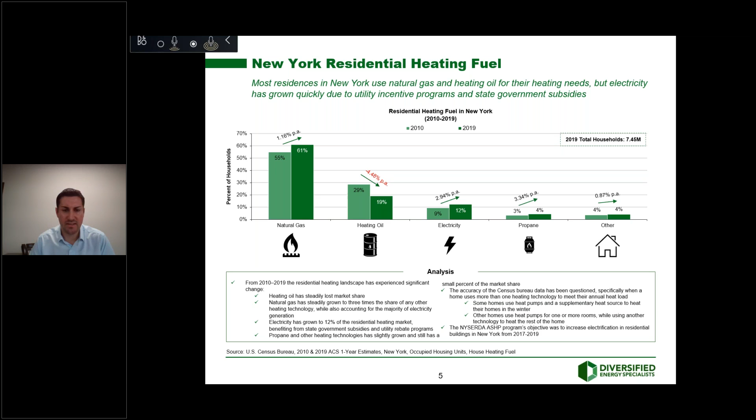Taking a step back and looking at residential heating fuel in New York from 2010 to 2019, the majority of homes are heated with natural gas, 61%, growing at over 1% per year. Heating oil heats about 19% of homes as of 2019, and it's been declining significantly—really the only heating technology declining over the last 10 years. Electricity has been increasing, with electrification initiatives certainly leading to that. Propane has been slightly increasing but still has a very small percent of the heat load.

Looking at the program, there were 5,756 applications from single-family detached homes for rebates over the course of these 3 years. The total of all applications for the program was just under 10,000. My study focused singularly on single-family detached homes. Of those, I determined over 93% were not whole home solutions, and about 6.7% were whole home solutions—that was about 386 whole home solutions over the course of those 3 years.

Putting that into perspective, you're talking about 130 homes per year converting to air source heat pump systems as whole homes. In the scheme of things, states set goals—New England ISO, New York ISO set electrification goals—looking to do hundreds of thousands of homes per year and have over 1 million homes. In New England, ISO New England wants over 1 million homes by 2030 converted to electricity.

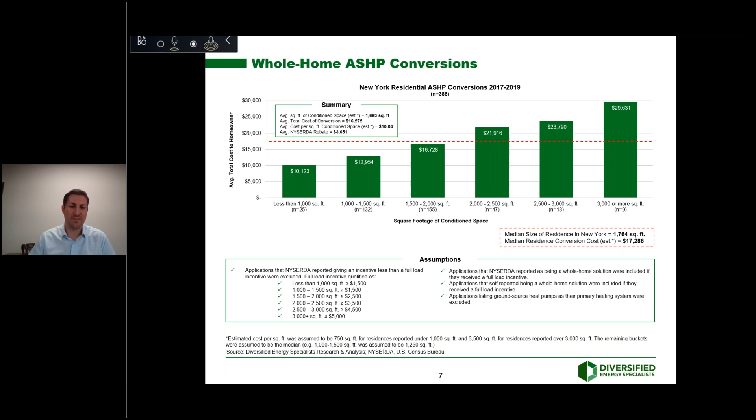The average NYSERDA rebate given for these whole home solutions from the system benefit charges was about $3,681. Scaling that and looking at the median size residence in New York, which is 1,764 square feet, the median residence conversion cost would be just over $17,000. So if you're looking to switch from whatever technology you have—heating oil, natural gas, propane—to an air source heat pump system, you're looking at spending at least $17,000 on average. I think that's significant and certainly telling as to why there are so few conversions.

I broke down the data a little more. I wanted to show—certainly in the Massachusetts study and in this New York study—the range was so wide. Typically with self-reported data, you see a really wide range of numbers. But looking at even the higher end, there's only 9 whole home conversions of 3,000 or more square feet, and the range is extreme. The lowest cost was $17,437, and the highest cost was almost $65,000. So it's very high cost.

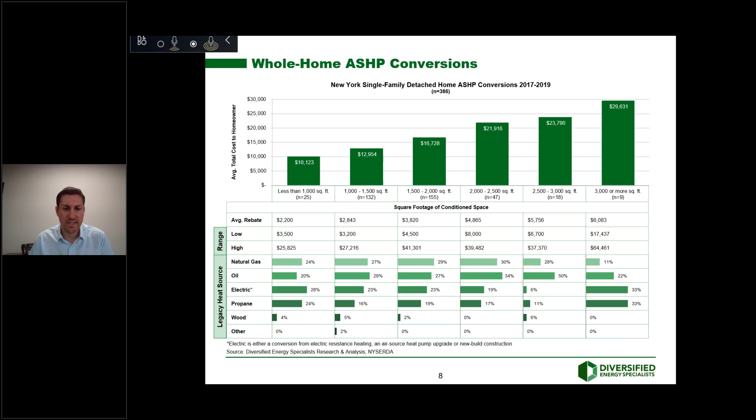Looking at the legacy heat source, the type of fuel used prior, it's mixed across the board. I think a lot of them were moving from either electric resistance or previous air source heat pump systems to an upgraded system, which I think would lower the average slightly. But that's kind of where it came out.

Looking at the legacy heat source, the majority, well, the largest conversion was from oil, then natural gas, electric upgrades, then you'll see propane, wood, and other as well.

Kind of understanding where the size homes based on the technology, you'll see it skewed slightly. The smaller homes typically are converting from electric. The larger the home you get, looks more natural gas and oil.

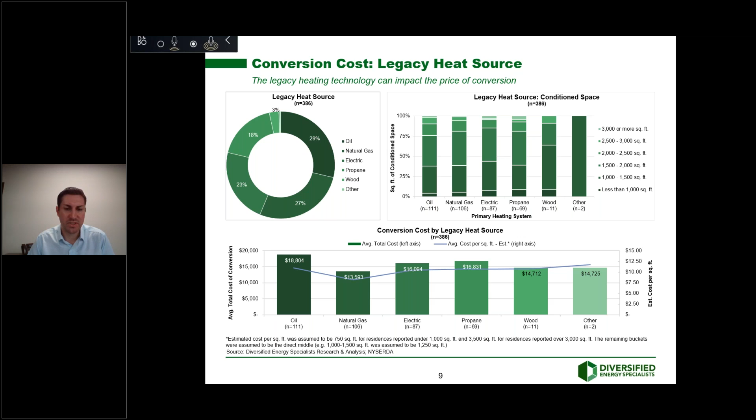But looking at the conversion cost by heat source, I think this chart's really important. There's 111 homes that converted from oil to air source heat pump systems for their whole home, and the average cost of that was almost $19,000. So it seems to, at least from this data, be skewed on the upside. On heating oil, it's going to cost a lot more to convert a heating oil home to an air source heat pump system than others. I think that's certainly a benefit to us versus the natural gas homes, which was almost more than $5,000 less on average for pretty much the same number of data points.

Looking at the heating system type, it was skewed across the board. I think looking at the self-reported data, there was a ton of unknowns and other reporting in there. So I think this was difficult, but I think the main point I want to make with this slide, and at least with this data, is that so many homes are so different, and whether you have a ducted system, baseboard heating system, central forced air, you'll see the conversion costs skew so much, and why you see such a wide range. For a 1,500 square foot home, you could see a cost of $10,000 or a cost of $55,000

based on how the home's designed, how the heating system's designed. So it's good to take a large bucket of data and find an average, but you could go out to any individual home and come up with a much different number just based on how the home, how the heating system, prior heating system was in place. So I think it's good to at least show there's such a range of heating systems, a range of legacy heat sources, and a range of prices to convert each home.

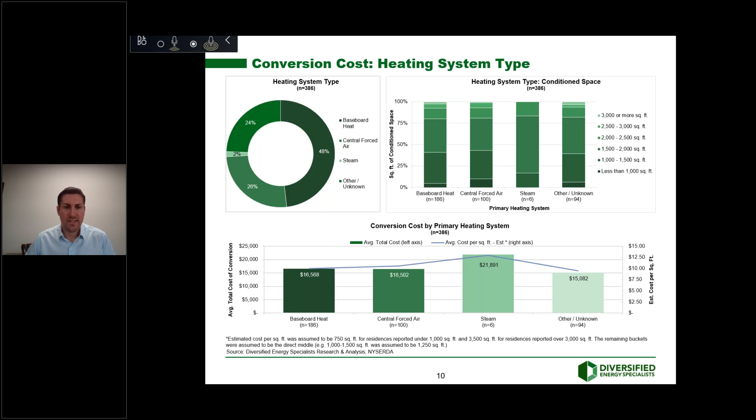So that was there. Moving on here, so location-wise, I kind of ran a heat map of where these air source heat pumps were installed. The whole home solutions part of the data source and reporting is they gave a zip code. So looking at it, you'll see very few whole home solutions were put in place in upstate New York.

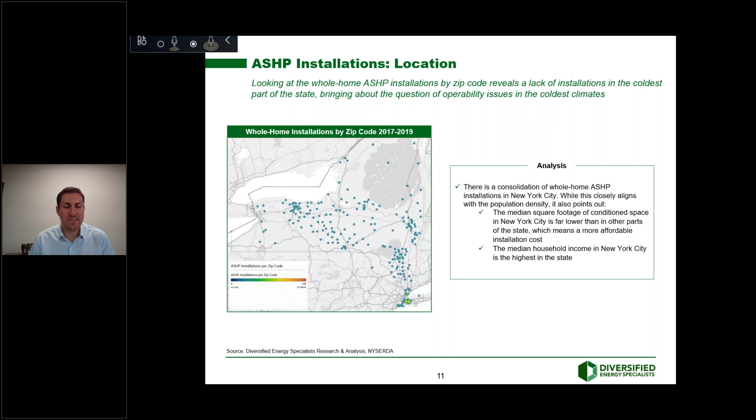In the coldest climates, I think it's much more difficult to use air source heat pumps to heat the entire home. In upstate New York, I think just the efficiency, the COP, the cold weather operability issues, you don't see it as much. And then, of course, looking at the condensed amount in New York City, typically square footage of residences are much smaller there, and that gives it more of an opportunity to use air source heat pumps to heat the whole home.

This map, I thought, was a pretty interesting one and telling, simply because looking at states that set goals for electrification and heating, they always talk about how the cost is high, which obviously this study proves, and others, but they believe that not only can it do the job, but it can be equally dispersed given the rebates across all income areas and across all communities.

I looked at the median household income by county at the U.S. Census data, and then looked at the counties that had the largest amount of air source heat pump installations for whole home across this study. Typically, the largest numbers happen in the highest income communities. And I think even more than that, although it's not shown in the data, I think you'll see only the highest income households were installing these systems.

So when we talk about climate equity, environmental justice, population, and greenhouse gases, you'll see that these types of programs, rebate programs, are really favoring the high income communities only, with the cost of $16,000, $17,000, $18,000 to install an air source heat pump system. It's a huge barrier to entry for environmental justice populations, and a $3,000, $4,000 rebate might seem like a lot, but still you're going to have to come up with $14,000, $15,000 to put one of these systems in.

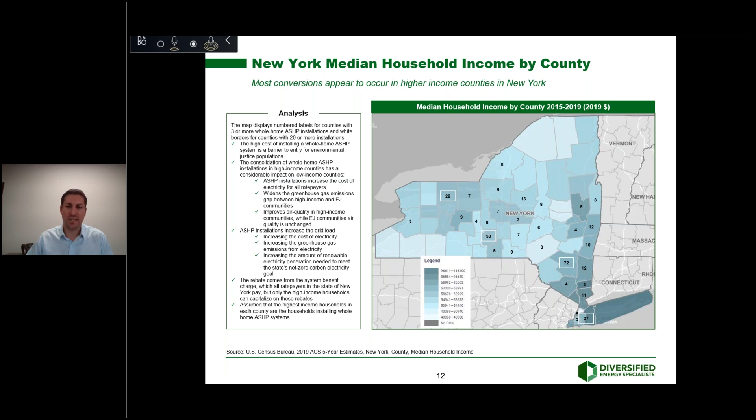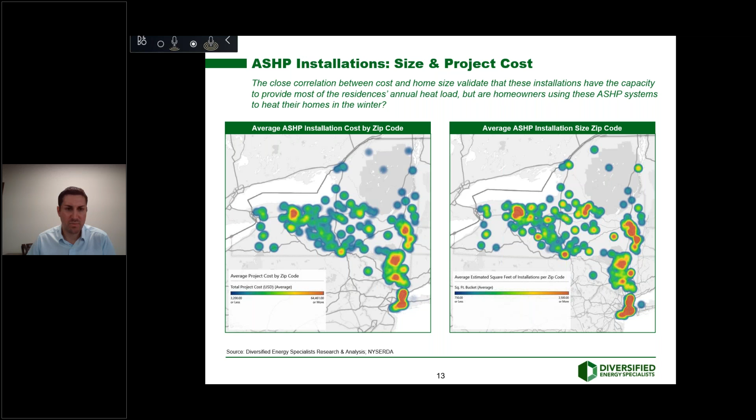It's another heat map looking at the installations and average installation cost by zip code. Typically, you're seeing the highest cost of installation in New York City, but also spread out otherwise. They're pretty expensive jobs to do.

So now looking at the secondary heat source, one of the, I'd say, difficult things with this study was there was no real sufficient data on what happened to the legacy heat source when this whole home solution was installed. So I tried to drill down and narrow out what that really meant. I think one of the biggest problems when saying a whole home solution can provide 90% of the peak heating load is it might be able to do that on paper, but there's no way to say whether that's actually occurring. There's been plenty of situations, one being the ISO New England 2020 heating electrification report.

They did an AMI study of 18 homes in northern Massachusetts, and they studied the electrical output hourly over the course of an entire winter of 18 homes that had natural gas or heating oil. Then the next winter, they put in air source heat pump systems that have the capacity to heat the whole home and measured the electrical output hourly from those homes as well.

And it turned out that all 18 used the heat pump systems for less than 50% of their annual heat load. Their legacy heat source of natural gas or heating oil stayed in place, and they were still used all winter. So even though these installations might have the capacity to heat a home, consumer behavior is showing that they're not actually using them to heat their home.

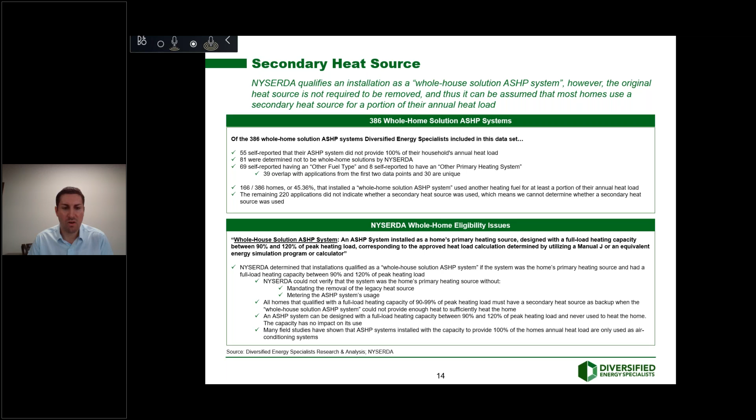So in the Massachusetts study I did, there was much more definitive data on whether there was a supplementary heat source used in the home. There was a specific question on it, and I wanted to just show the results from that study to kind of show the secondary heat source and what a whole home solution really is. So Massachusetts Clean Energy Center provided an air source heat pump rebate program from 2014 to 2019. So over a 5-year period, and about 622 of those I determined to be whole home solutions.

Of those, almost 93% reported having a supplementary heat source that they use for at least a partial amount of their annual heat load. Of that, you can see what the legacy heat sources were that were kept as supplementary heat sources. Small percentage, about a quarter, was electric resistance, and the rest was natural gas, oil, propane. So despite the claim of whole home conversions based on calculations, capacity, the actual use of these systems, it's being self-reported that they're not actual whole home solutions, and they're not actually being used in the winter to heat their homes.

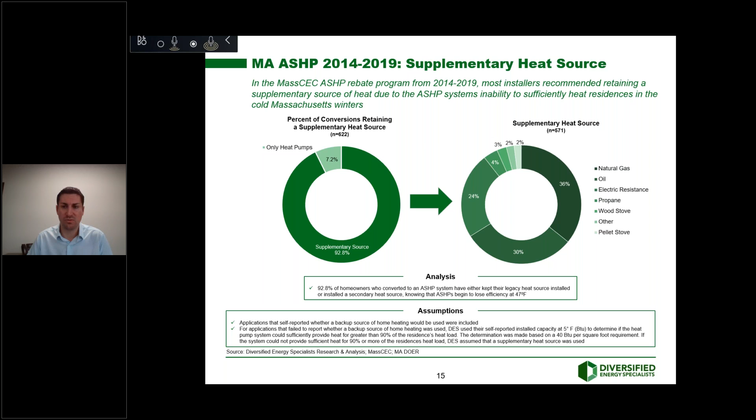So looking at the ISO New England 2020 heating electrification that I mentioned before, and other field studies here, it's clear that despite all of the installations that are forecasted and the slight grid load forecast and everything else, politicians and environmental groups are kind of basing their electrification future studies on what's happening in the field right now. And I think what's happening in the field right now is you're looking at whole home solutions or claimed whole home solutions, and they're not actually adding a significant load to the grid, and they're not actually adding a significant load to the winter peak. The reason for that is they're not being used in the winter, they're being used as air conditioning systems.

So you're seeing environmental groups, ISO New England, ISO New York, and others project grid load increases from air source heat pump installations in homes as much smaller than they really should be. Because of that, the capacity they'll need to reach 100% renewable electricity in the future is much smaller than they actually will need. So I think that is a good thing for our industry, but it's something to certainly point out as we move forward.

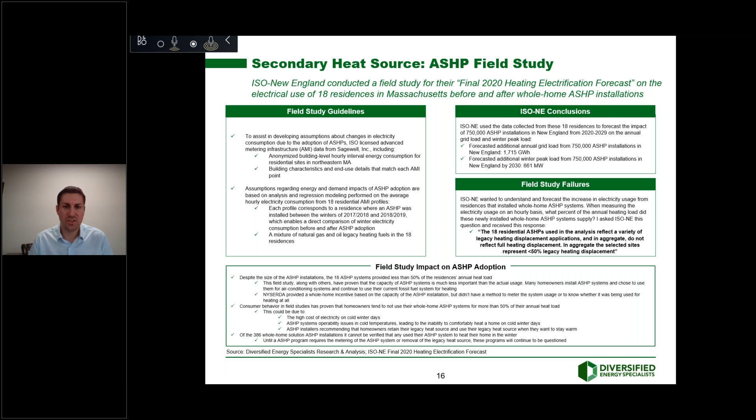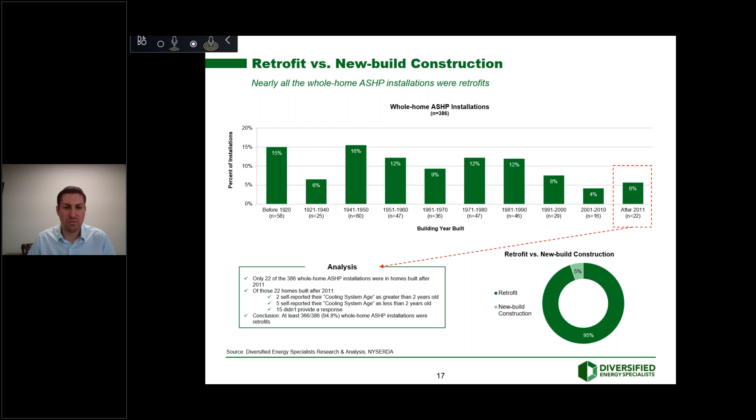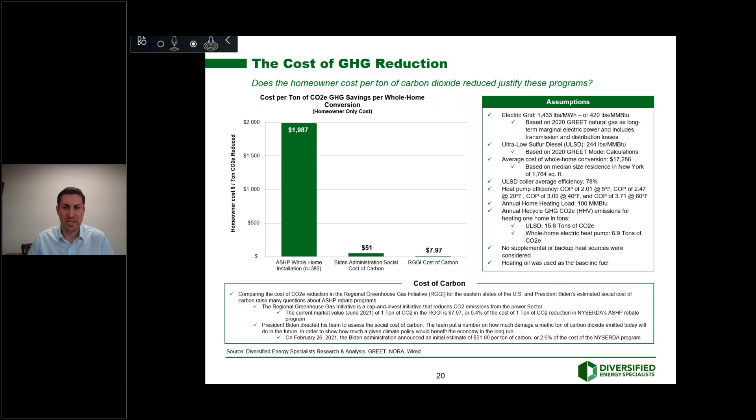Looking at RGGI, Regional Greenhouse Gas Initiative, it's a cap and invest program for the power sector that looks at reducing CO2 with renewable electricity generation. That's currently priced at $7.97 per ton of CO2 reduced. So looking at those numbers specifically, these air source heat pump rebate programs, the money's coming from every ratepayer in the state. It's given to only the people who can afford these installations, and the cost of these programs far outweighs the climate benefit of these conversions. So I think this is something that I know Rich Sweetser is working on and others, and this is something that we'll need a deeper dive into because it really highlights the problem with these programs and electrification policy across the board.

You can look at census data and say, oh, okay, 15% of homes in the Northeast are using electricity to heat their homes. But at the same time, they still have a heating oil or natural gas system in place when they installed these air source heat pump systems, and they might only be using these air source heat pump systems to cool their home. So you really do have to question that.

And then, the consumer behavior and why they're not using it. I mean, the cost of electricity is the highest in winter. And not only that, there are operability issues when it gets really cold, especially upstate New York, all of northern New England. Operability still remains a question.

And personally in the APS program, I work with homeowners that put in air source heat pump systems, ground source heat pump systems, and others. But the installers that install these air source heat pump systems are recommending to the homeowners to keep their legacy heat source if they want to stay warm in the winter, because they're going to have problems operability wise.

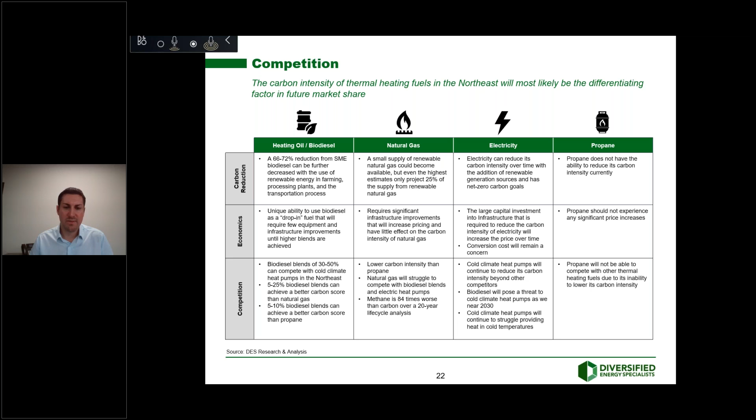Natural gas has RNG, but it's very limited supply currently, and to think that they'll be able to scale it, especially with the amount of natural gas being used for electricity, is really tough. The highest projection I've seen is 25% of the gas supply will be renewable natural gas by 2050. So, at scale, natural gas and propane cannot reduce their carbon score. We can, and electricity obviously can over time, but as they add more air source heat pumps, they're increasing their grid load, which makes it a lot more difficult.

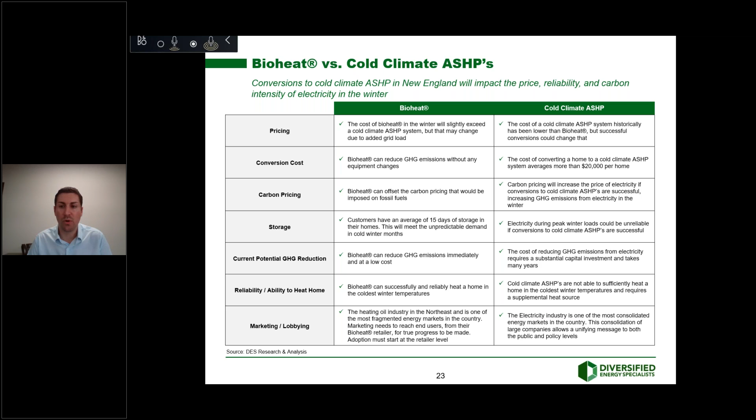With that, if there are any questions that came in during the course of the chat or anything else, I'd be happy to take a few minutes and answer those now. Yeah, thank you, Joe. We have a couple of questions that we can kind of run through here as sort of a rapid fire type deal. The first question that came in, can you hear me okay?

Yes, yep. Okay, do you have an opinion as to why the number of heat pump conversions is so low? Is there a workforce issue at play, or are the utilities simply doing a poor job of convincing homeowners to switch? Yeah, I think it's a little bit of both. I think in New York, NYSERDA has a program where they're trying to bring on more installers of these heat pump systems, and I think there is some pushback, at least from installers that I've spoken to, of the reliability of these systems.

As far as the speed of conversions, why it is so low, I think the extremely high barrier to entry as of the cost is the most significant factor. I mean, to ask the average homeowner to drop $20,000 on a system, and then, by the way, keep your heating oil system or natural gas system in place if you need it for when it gets really cold, it's a tough sales pitch. And I think you're just simply seeing low adoption despite the push.